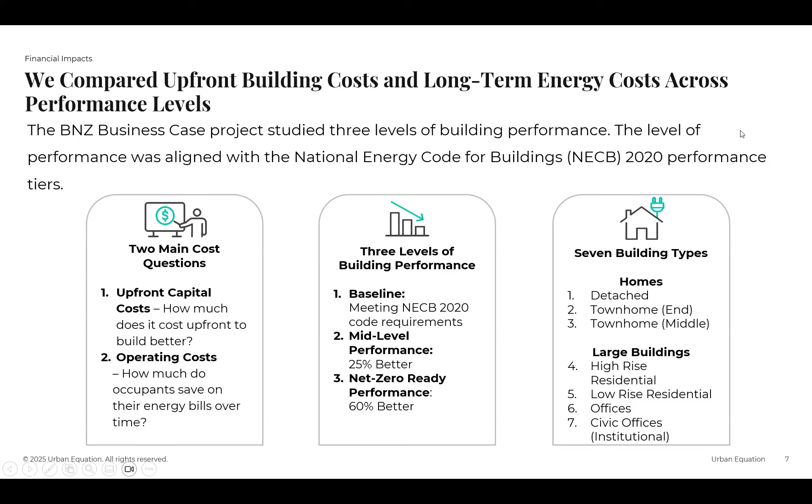So there are some limitations. In order to cover all those building types, those regions, those climate zones, we were able to leverage the work that Natural Resources Canada has already done creating the code. And they created a number of energy models which were available for us to process. But it's important for you to know that while we leveraged models that existed, and those models did have changes for the different climate zones, we didn't actually do any design ourselves as part of this study. So there's always further optimization that can be done to really dial in on those energy cost savings. One of the limitations of this study is we were picking models that already existed from a number of iterations that NRCan had done during the code development process within all of those tiers, but we weren't able to fine tune them. So they are optimized for climate zone based on the models that are available.

Climate zone is important because when we look at climate zones on a map, and I'll show you this in a minute, the more heat that's used over the course of the year, the higher the number of the climate zone, right? So our single family homes within the same climate zone were always the same. The same with our offices within the same climate zone, they were always the same. They changed when we jumped from one climate zone to another.

The other thing that's important to know is that the energy consumption and the corresponding energy costs that are spit out of these models are based on the schedule of operations within the code itself. So the code says if there's this many people, this is how they behave, right? People behave how they want to behave in reality, but when it comes to the code, you have to follow their list of prescribed schedules. So it is a possible outcome. If somebody moves into the house and installs a hot tub, they're not going to see these energy costs, right? So it's important to note that it's based on the code.

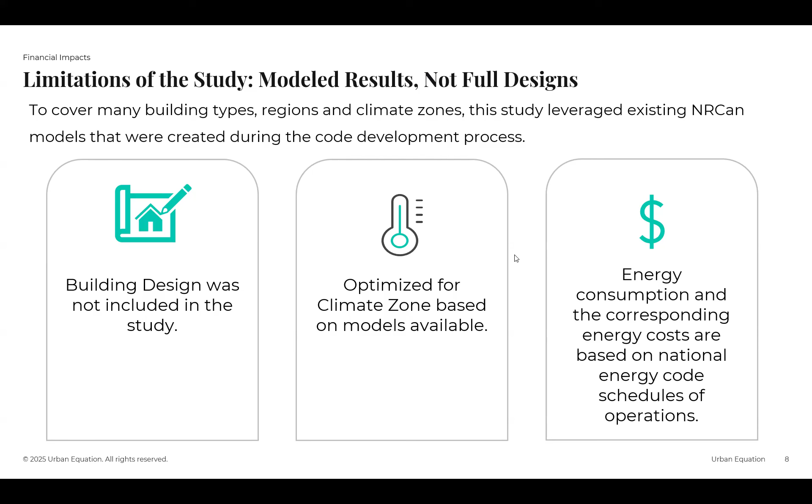So for the costing methodology, for the large buildings, we were a bit more sophisticated. They are more sophisticated buildings. So we created the baseline costs using the Altus price guide. So Altus is a costing consultant. They produce construction cost guides every year that talk about the average cost of construction across a number of different building types in a number of different cities.

So it's per square foot. We used the midpoint in that range. Typically, in an urban area, we might find the high point in that range is more accurate. For this study with the cohorts that we had, we had a lot of rural areas. The midpoint seemed to be the right number to use. We also didn't include underground parking in these archetypes, so it's just the building above ground, and that also seemed to fit best with the rural mix of the types of places we had.

So in terms of the cost premiums associated with the different systems, as we went to tier 2 and tier 4, we were able to get information on the different changes made to those buildings right out of the energy models from EQ Building Performance. Our team at Urban Equation was able to cost those changes using the RSMeans costing database. So it's a piece of pricing software that has costs for different components, including the installation, for a number of different cities across the country.

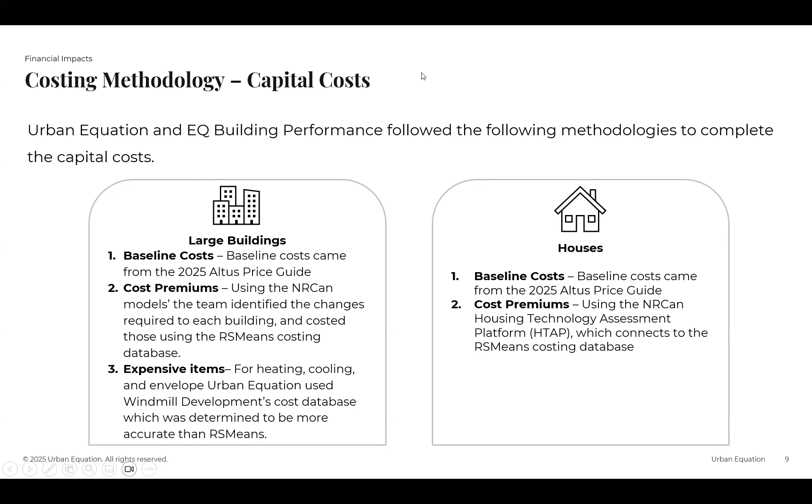I mentioned climate zones earlier. This is a map. You can see if you go all the way west down to the Victoria, Vancouver area, you will see a little green dot. That is climate zone 4. That's all we get. Climate zone 5 is the orange. That's parts of southern Ontario, the very southern tip of Nova Scotia, and parts of western BC. Most of the country is in climate zone 6, which would house a lot of the major cities.

Climate zone 7, things are starting to get really cold, and that's where we see the prairies, Winnipeg, Regina, Edmonton, parts of Calgary. I'm pretty sure Calgary is split between climate zone 6 and 7. And then when we get into climate zone 8, that would be the high Arctic. So we didn't have any climate zone 8 in this study. We also didn't have any climate zone 4.

So climate zone 5, we had cohorts in Ontario and BC. So all of the buildings for those cohorts are consistent within climate zone 5. In climate zone 6, there were other areas of Ontario, but we also had Newfoundland, Nova Scotia, and New Brunswick. And then climate zone 7, we had Manitoba, Saskatchewan, and Alberta.

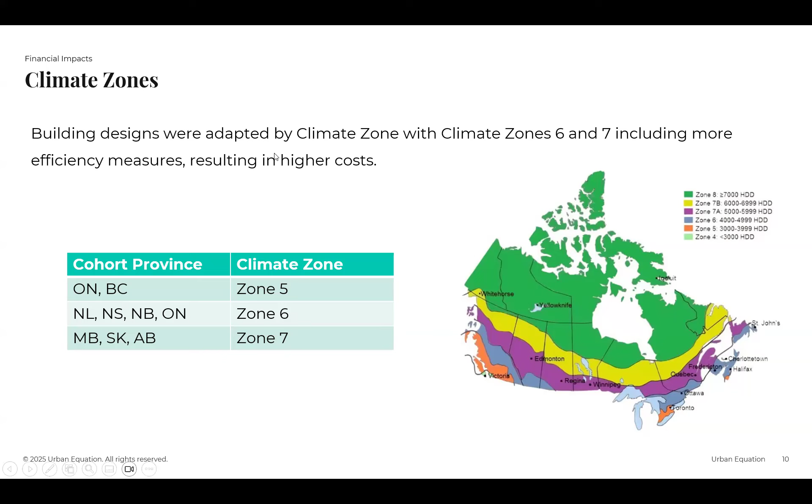So just to give you an idea at a high level of the energy efficiency measures that were used to improve the performance and reduce the carbon emissions. So the homes, whether that be detached single-family homes or townhomes, the code buildings, the baseline always had natural gas heating, and then everything else was prescriptive as per the National Energy Code.

When we got to tier 2, it was a full switch of that gas furnace for an electric heat pump. And in pretty much all the cases, that was all that was done. To get to tier 4, the 60% better, that's where the heat pump efficiency was improved, envelope improvements happened, it was Energy Star equipment, and there might have been some other small efficiency adjustments as well.

But for the larger buildings, the mid-tier was a little more complex. So we still started with natural gas heating. When we got to tier 2, we actually went to a hybrid electric heat pump with gas backup. So this had a heat pump system, but also a gas furnace for the colder days, and then improved the

ventilation efficiency. And when we got to tier 4, that's when we really got into things like improved windows, reducing the size of those windows, connecting the heat pumps to a geo exchange or geothermal loop, and then efficient equipment and sensors, automation, and things like that. So tier 2 was a light touch, tier 4 was a deep touch.

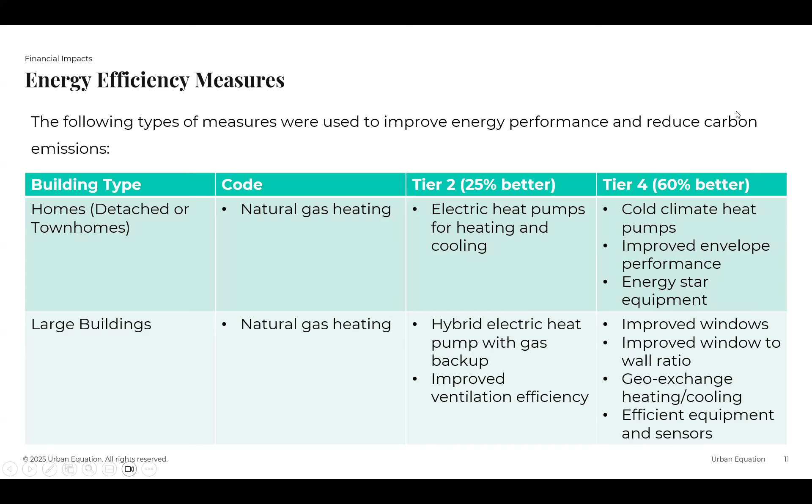And with that, I'm going to pass it to Andrew, who's going to take you through some of the results before he passes it back to me for the other parts of the research. Thank you, Finn, and thanks for such a detailed breakdown of our methodology, and thank you to the audience for being here today. So here to reveal our findings in terms of the financial impact.

What surprised us, and perhaps the audience will find it surprising, was building to a higher tier, especially tier 2, is a fairly marginal increase in terms of the capital costs paid by developers. Obviously, that's dependent on a variety of factors, but in most cases, it's a low single-digit increase. So you'll see tier 2 is quite achievable in terms of the additional capital cost expense.

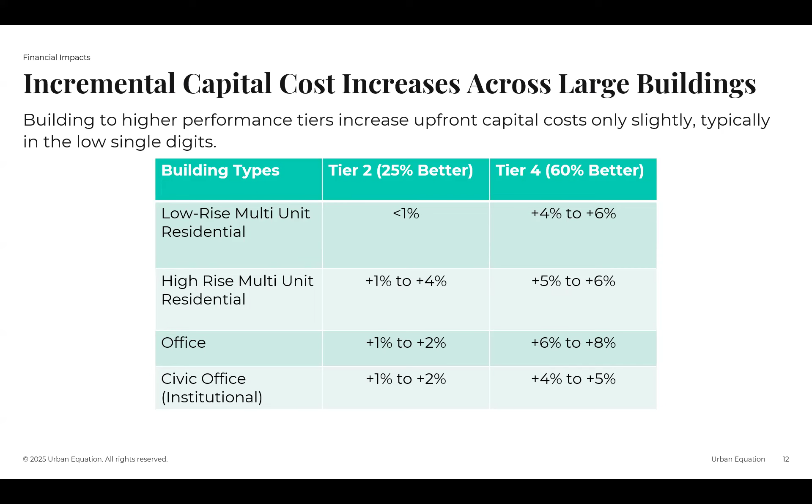And as you add in those layers Finn mentioned to reach tier 4 with the geo exchange loop and some more complicated building automation and sensors, those costs can increase. But I wanted to show the next slide that displays these incremental capital costs as you increase in tiers across the colder climate zones.

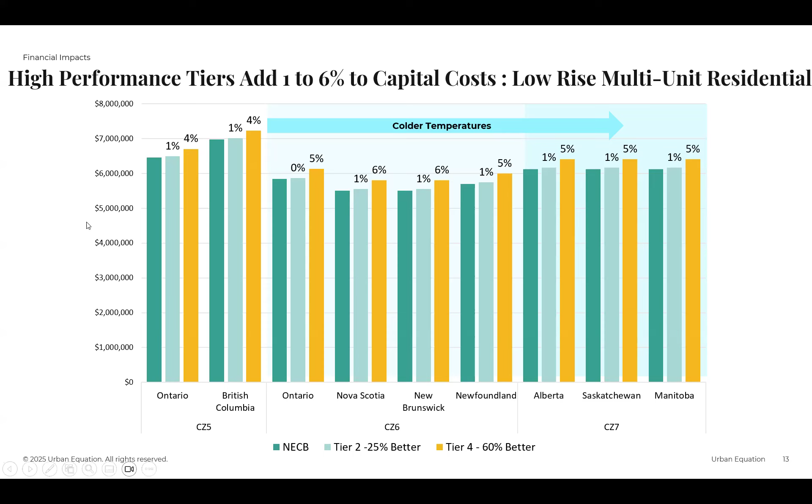So on the next slide, I just wanted to zoom in and show what that incremental increase translates to in terms of the operation savings for either the building occupants or the building operators. So you can see in Climate Zone 5 in Ontario and British Columbia, a 1% increase in capital costs leads to a nearly 50% energy cost savings annually and over the lifetime of the building. So it's a fairly simple switch.

I'll caveat this by saying as we go into the colder climate zones, it becomes slightly more complex and it's not an instant translation into savings. But what we can see here is that the payoff is quite remarkable.

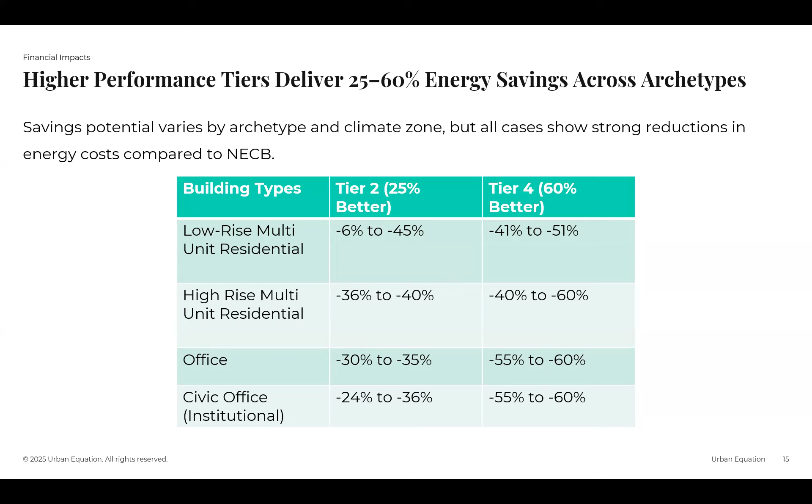So I just wanted to show on the next slide as well how that translates across the other archetypes, not just low-rise residential or multi-unit residential. You can see building to these higher performance tiers leads to between a 25 to 60% energy savings across all the large archetypes. And that's a very positive finding in our opinion, and hopefully makes a compelling case.

And just moving on to the next slide, you'll notice here some of those caveats about the climate types and the energy sources. Nova Scotia and Newfoundland, the two cohorts that we examined, were using fuel oil as a method of heating. So obviously fuel oil is very expensive. So the switch

to electric recognizes a larger cost savings than say in the prairies, climate zone 7, where natural gas is quite abundant. So moving to that second tier build, you don't realize as much of those energy savings as you would hope. And then with those envelope improvements Finn mentioned earlier in the presentation, you begin to see those paybacks with the improved envelope.

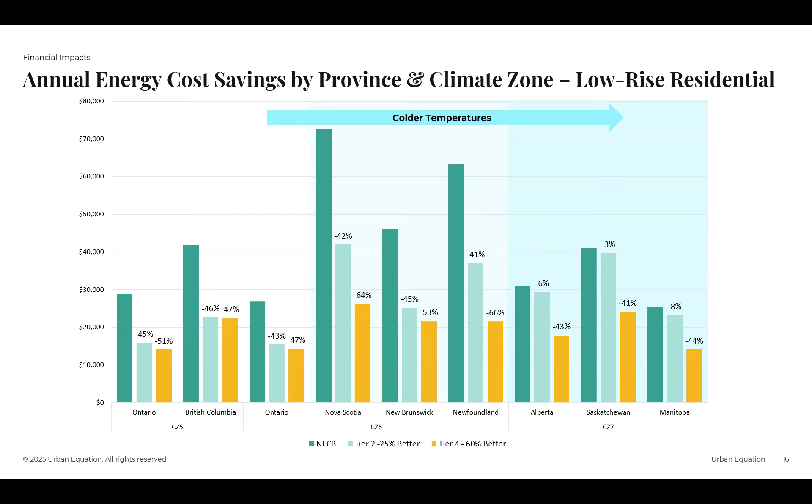And the same observation carries through to an archetype that's probably more relatable for most folks. So single family and townhomes, we see much of the same findings. So reaching that tier 2 is anywhere between a 2 to 7% increase across a single family home, a townhome on the end, or a townhome in the middle.

And then, as you look to achieve those envelope improvements, as well as the cold temperature heat pump, the cost increases again marginally. So just showing that on a wider scale. And again, this chart and the next slide is going to be relatively familiar and simplistic, but as you can see, we're looking to achieve those higher building tiers, but the cost is not a significant jump.

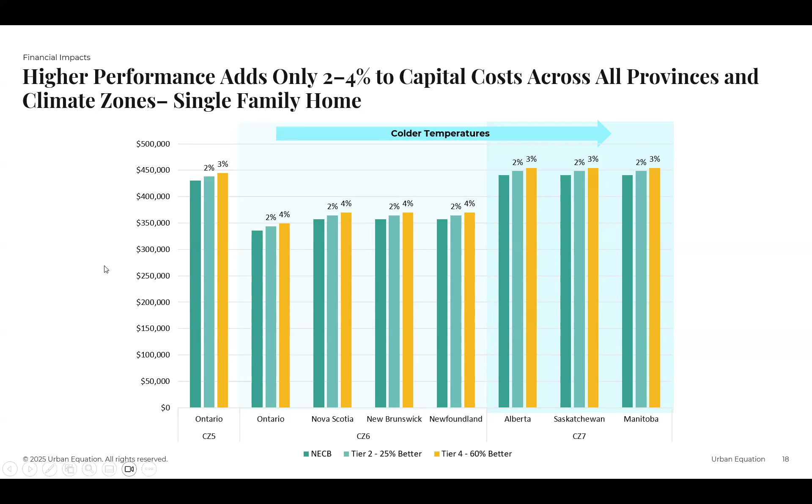And then when we carry through to just look at how that translates to energy savings in the next slide, you'll see that tier 2 doesn't necessarily yield as much improved energy savings as tier 4.

And as Finn mentioned, this is due to some of the limitations of the studies and as many permutations as we did. Tier 2 really for the residential homes was swapping out a natural gas furnace for a heat pump. So in some climates, as we'll see in the next slide, that doesn't always necessarily translate to energy savings if not done correctly.

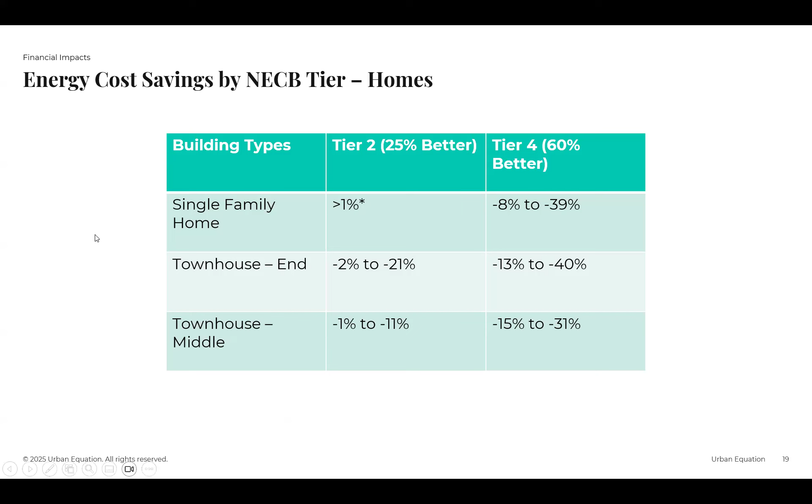So as we can observe here, in certain climates, in Ontario in climate zone 6, as well as you'll see in the prairies, switching over to an electric heat pump actually increases your energy costs, because you're dropping the natural gas, which is relatively cheap, and you're switching to a heat pump to heat your home in the thick of winter without improving any of the walls or windows. It actually leads to a jump in price.

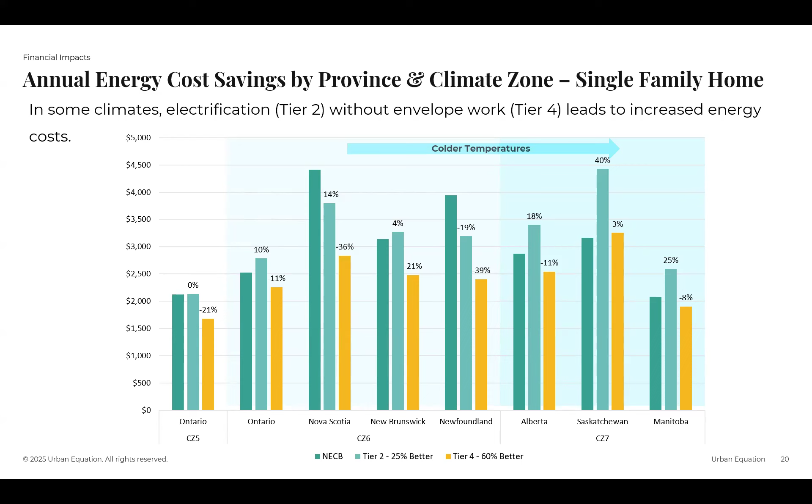However, as Finn mentioned, you can design for this to address this without going to the completely next tier. So these figures can be improved. And just moving on to the next slide, I just wanted to walk through the key technologies that we used in these models to develop these results. So heat pumps, obviously everyone's very familiar with, but as well as geothermal, heat recovery ventilation, air tightness, improved insulation, improved windows, building automations and sensors, Energy Star appliances, and LED lighting.

And as Finn will allude to further along in the presentation in terms of the market research, these technologies are really dependent on them being available in the market as well. So that's also something to keep in mind as we are developing a business case.

Thanks, Andrew. I have one more slide just to finish it off. Sorry. So I know there's a lot of charts and numbers and tables, but if there's one takeaway from both the large archetypes as well as the residential, it's that developers face a marginally higher capital cost to build to these performance tiers, but occupants actually stand to realize significant energy savings over the lifetime of the building. And as Finn will get into in the market research portion, the market conditions and the energy costs will impact the feasibility and achievability of these results.

So just a couple of observations: the upfront capital costs are borne by the developers, and the energy cost savings, I should say, are passed on to the occupants or owners of the building. And then the difference between the gas and electricity rates is going to have a significant impact on those cost savings. So if the price of electricity is much higher than the low cost of natural gas, you're going to see diminished cost savings.

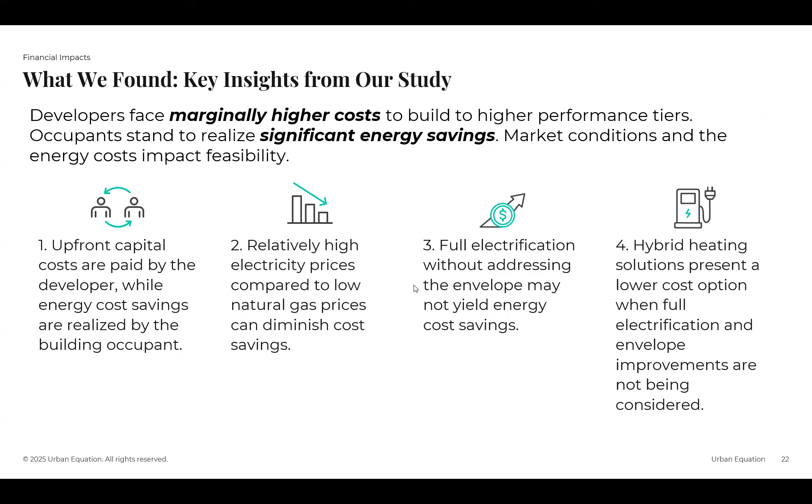So let's dive into the market research portion of the work now. So we obviously know that the costs are going to vary across the country. When it comes to the cost difference between one rural area and another, it's really difficult to predict those costs with any certainty, because if you've ever tendered anything, the price isn't the price until someone bids on it. So it really is a function of how busy they are too, right?

So what we wanted to do with the market research portion of this work is to assess the current market availability of some technologies by evaluating the suppliers, both locally and nationally. So we did look at 4 technologies that were present in the buildings that we modeled: heat pumps, geothermal drilling and tubing, high performance insulation, and high performance windows. Those were things that were on the previous list you saw. We also added solar PV to this, and while net zero ready buildings don't use solar PV, net zero ones do. So we felt it was also important to look at the availability of that technology as well.

So in terms of our methodology, we mapped out local jurisdictions and we were looking for things within a 1-hour drive. We did check with different societies to figure out what a good travel distance was, and it does really vary, whether you're urban or rural, and it's not uncommon for people to drive further than that in some rural areas for work. But we kept it to 1 hour to be consistent. So we counted within that 1-hour radius of each of the cohorts the number of suppliers for each technology, and then we gave a diversity score based on that. So the red would be 1 to 3 suppliers, the orange would be the medium, 4 to 6 suppliers, and then high would be 6+.

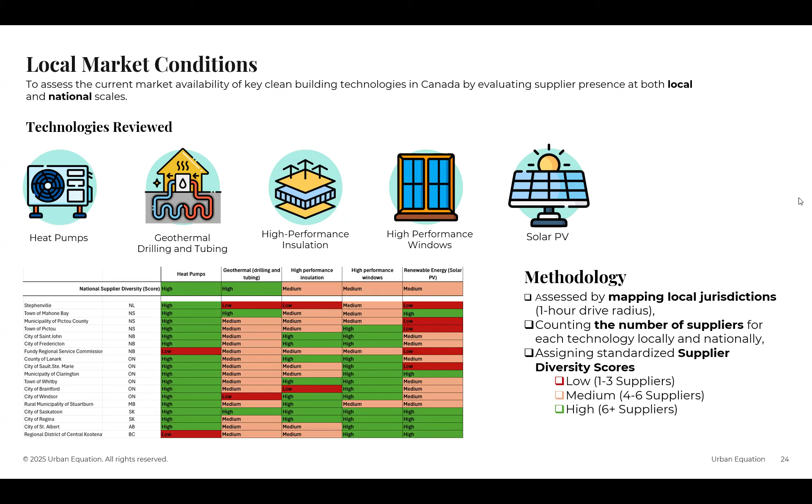And even heat pumps, where we saw pretty good coverage, there was a lot of suppliers. There's still not enough suppliers to supply everybody, right? So we used a diversity score that maxed out around 10 suppliers. So we need a lot more than that if we're going to supply everyone with heat pumps and have technicians able to show up for service when it's needed. So there's still work to be done in order to build those markets.

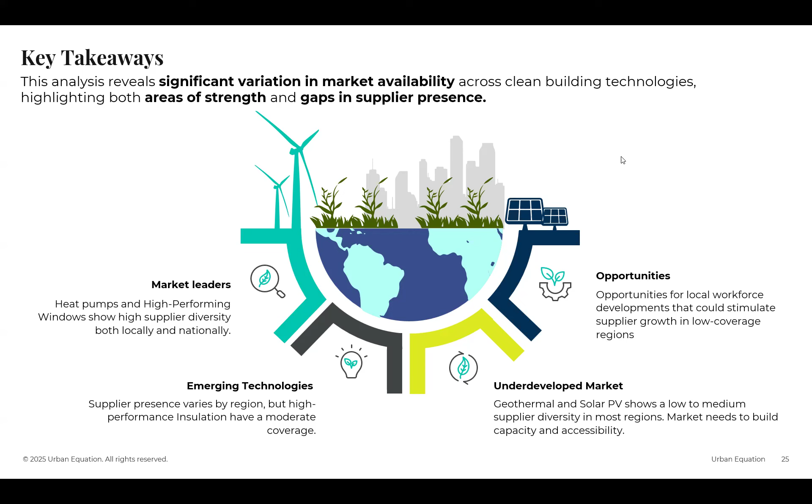Let's move on to the health impacts now. I have a couple slides on this. It's a complex topic, but we did summarize it quite simply. So net zero buildings can address health impacts, ones associated with combustion in particular, through a number of different avenues. So front and center, we've got reduced combustion. Obviously, if we're not burning things, we're not polluting. But there are also pollutants that leak as a result of that too. So natural gas leaking into your space can also be dangerous.

So net zero homes minimize combustion. They get rid of furnaces, they get rid of gas stoves, they get rid of gas fireplaces, and they replace it with things like electric heat pumps, electric or heat pump hot water heating, and induction cooktops instead of gas stoves. And I have an induction cooktop. I love it.

In terms of ventilation and filtration, net zero buildings will use heat recovery ventilators or energy recovery ventilators. This allows fresh air into the space, and that's really important when you talk about sealing the buildings up, right? And if you look at the details of the energy efficiency measures we used, the higher tier always involved some level of infiltration improvements, so making the building more airtight. When you do that, you can end up with a buildup of heat and moisture. You need to be able to ventilate in order to control mold and other things in the space. But when you do that, you get continuous fresh air.

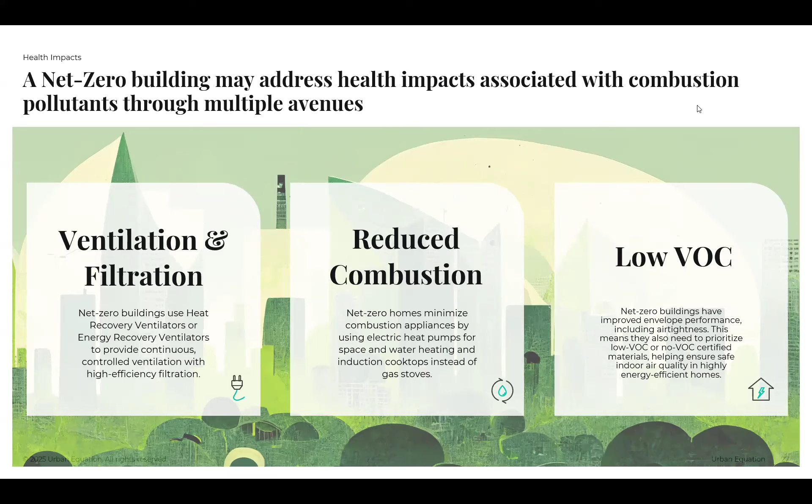So there's the number of pollutants that are associated with combustion, whether it's carbon monoxide, carbon dioxide, sulfur dioxide, nitrous oxide, that end up inside our home or in our communities. We spend 90% of our time indoors, and there's 300 annual deaths in Canada attributed to carbon monoxide alone. So it's not just for energy savings, it's for our health.

Those pollutants also have a number of impacts. So they can cause respiratory effects, irritation, asthma, or nausea. There's cardiovascular effects, so the risk of heart attack and stroke. You can have toxic exposures such as carbon monoxide poisoning, and there's even safety hazards. So I mentioned earlier, if you have natural gas leaking into your space, and there's always a little bit of leakage, but if you had a major leak, that could be a real safety hazard.

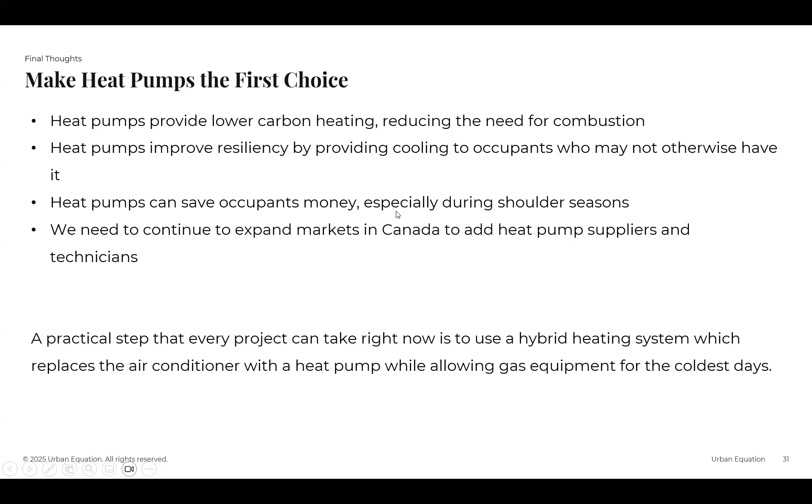The next thing is to push the envelope, and that's really what it takes to get to the next tier. So improved envelopes give us those cost savings that we aren't able to get with heat pumps alone. They also provide an enhanced thermal comfort and improved health and well-being. I mean, if you've ever sat next to the window in an office tower, you know, it can be full of glare, the radiant heat can be terrible. But then when the sun goes around the other side of the building, you're cold, right?

So improved envelopes make us more comfortable in our space. They make us more productive. They also, when you pair them with proper filtration and low emitting materials, can actually protect indoor air quality too. Because like I said before, older buildings are ventilated through the wall, newer buildings are ventilated through ventilation systems with filtration.

So some practical steps that can be taken. Conduct air tightness testing and look for easy wins. I tell this to small scale residential developers all the time. If you do a blower door test and smoke machine, you can find some quick leaks and seal them up with some caulking. For bigger projects, reconsider the window size and the placement. Our development team at Windmill has been building high performance envelopes at almost no cost premium because we use smaller windows placed in the right places.

Windows always perform worse than walls. They're essentially a hole, right? So the smaller the window, the more wall you can have and the better efficiency you can have. And windows are expensive, so the smaller they are, the less money you spend on them.

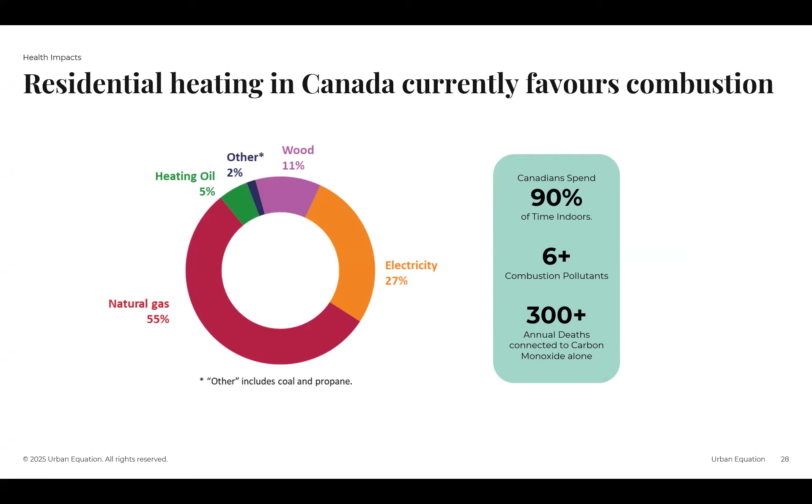Yep, thank you. Keep the questions coming, everyone. Lots of good questions there. If you can go back to slide 28, are the proportions based on the number of households or units of energy? This one, yeah, that one. It would be on the units of energy. Yes. And did you account for radon in your assessment of health impacts? No, we didn't. Yep. Good questions, everyone.

Keep them coming. In costing the electrified scenarios, did you include secondary costs, for example, increasing the size of electrical service and distribution, or only focus on the core equipment? For the larger buildings, we did, based on Windmill's experience. We did use sizing of the equipment within the building; sizing of the exterior equipment, like the distribution stations and things like that at the grid, were not included. So I know sometimes if you're retrofitting and there isn't capacity, those costs need to go in. We only looked at the cost within the building. And then for the smaller homes, townhomes, we didn't at all factor in service upgrades.

And did you model energy performance based on standard filters or a high MERV? I don't have the answer to that off the top. I'd have to talk to UE, unfortunately. Yep.

And another comment on the order of operations. If you could just speak a bit more about order of operations, envelope first versus heat pumps first. Yeah, I mean, good design would look at all of those things at once. If you can't do them all, I would say the single biggest impact you could have is switching your air conditioner for a heat pump so that you have the ability to run it in reverse during the shoulder seasons. But a building works as a system, right? So designing and honing in on the exact energy savings and carbon reductions you need is the right way to do it. We weren't able to do that with the 90 some permutations that we have in this report.